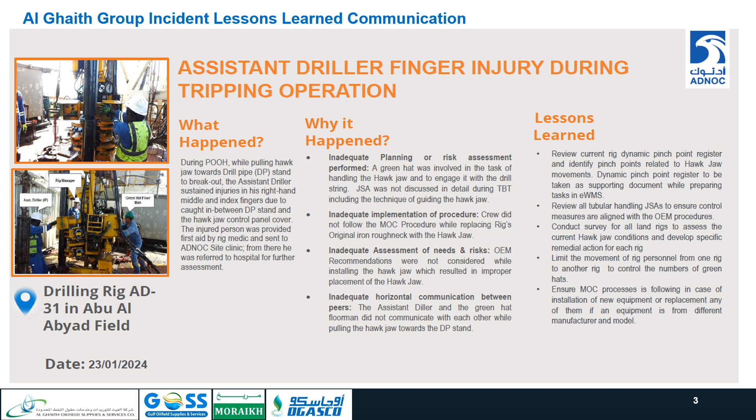Condensate pump fire at compressor station 1, CS1, at gas compression station 1 in BAB field. What happened? While conducting routine morning surveillance in the vicinity of condensate pump at CS1, the operations technician observed smoke from the drive end of the condensate pump, 11-31 P3701. The operator immediately shut down the pump after noticing some sparks and small flame. He immediately extinguished it using nearby fire extinguisher. No injuries were reported due to this incident and there was no impact to the facility or production.

Why it happened? Inadequate technical design. FCV was oversized, and the material was not appropriate, which resulted in poor control performance of spillback control valve. Inadequate assessment of needs risks. Continuous flow and discharge fluctuations were attributed to passing of FCV and improper configuration of controllers. Inadequate implementation of procedure, operating the pump beyond normal limits, runtime, resulted in excessive wear and tear.

Inadequate oversight. Main pump, P3702, was under repair for extended period, greater than or equal to 1 year. Standby pump was not available. Learnings not embedded. No timely actions on recommendations from 2022 RCA on the similar issues.

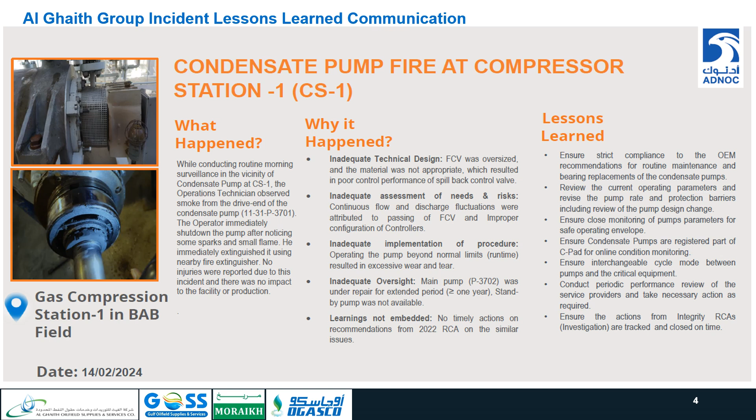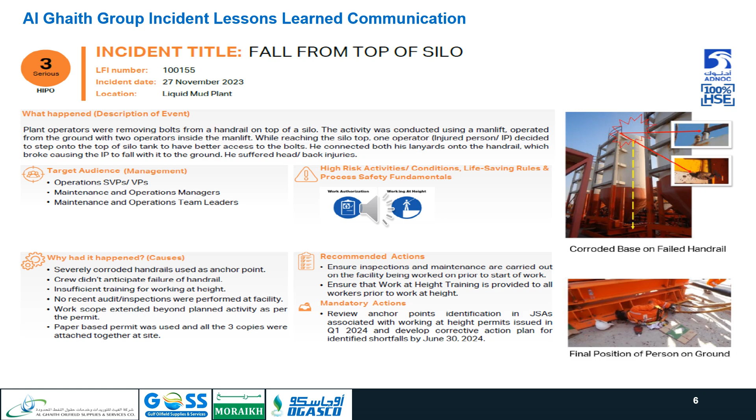Drill pipe joint dropped from rig floor to ground level at drilling rig AD 135, SB 634, in Asab field. Incident description: during run in hole with third-party 2 7/8 drill pipe, with a fishbone bottom hole assembly, while handling joint number 6 on the rig floor. The drift rabbit was lodged inside the drill pipe and crew were attempting to dislodge it by hammering. However, the drift rabbit remained stuck. Subsequently, decision was made to lay down the joint by the hydraulic catwalk.

As soon as the driller attempted to lift the joint, it suddenly slipped from the elevator to the rig floor, approximately 1 foot, and finally dropped to the ground level, 30 feet, near the V-door area. No injury to personnel and no equipment damage reported due to this incident.

Initial findings: improper use of equipment, using elevator directly with 2 7/8 drill pipe instead of using lifting sub due to insufficient elevator shoulder on drill pipe. Inadequate equipment, outer diameter of the drill pipe box and the inner diameter of the elevator were almost the same size, measuring 3 1/16 inches. Routine activity without thought. The rig crew did not measure and record ID, OD, and fish neck of tubulars in tally book.

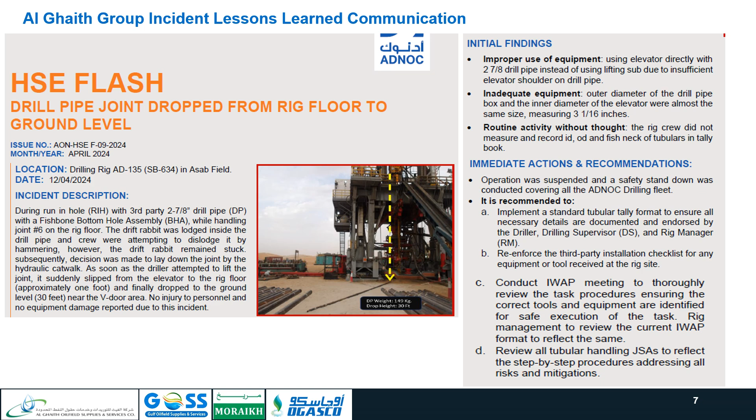Roustabout left leg caught between drilling pipe bundles at rig deck. What happened? Description of event: deck crew and crane operator were working on cantilever deck for laying down the drill pipes and arranging into bundle.

While the crane operator lifted the bundle 1 foot height to install a clamp and tag line, the bundle swung towards the IP, injured person. The IP moved away and tripped over by another bundle of drill pipes placed on the catwalk. The leg of the IP was caught between the drill pipes on the catwalk and suffered leg injury.

Why had it happened? Causes: expired/incorrect PTW lift plan in use. Crane operator is not competent to perform the task effectively. Not fully certified with limited English proficiency. 2 bundles were racked on the catwalk, creating an unstable bundle/trip hazard. Crane operator picked up the drill pipes bundle without signal from the banksman. Crane boom was not centered above the center of gravity.

Recommended actions: plan a stand down to refresh teams of the following: lifting plan endorsement/approval, permit validity, job roles, stop work authority, life-saving rules, drive the process of having and using only specific JSAs, non-generic, and approved lifting plans are in use.

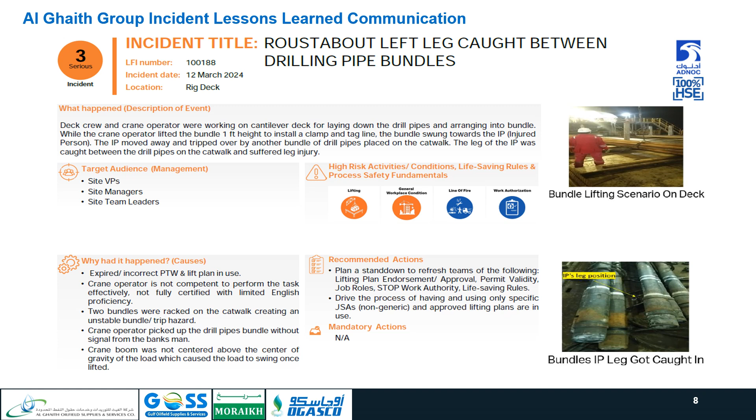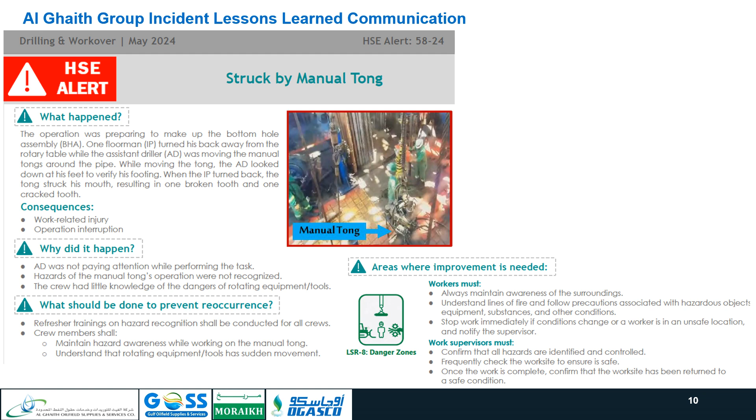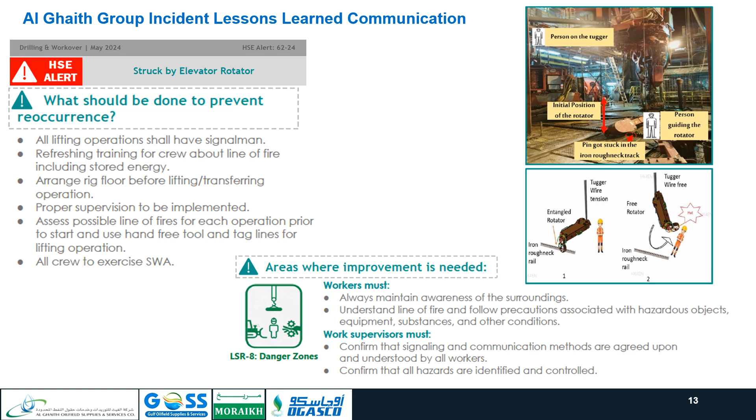Areas where improvement is needed: workers must always maintain awareness of the surroundings, understand line of fire and follow precautions associated with hazardous objects, equipment, substances, and other conditions. Work supervisors must confirm that signaling and communication methods are agreed upon and understood by all workers. Confirm that all hazards are identified and controlled.

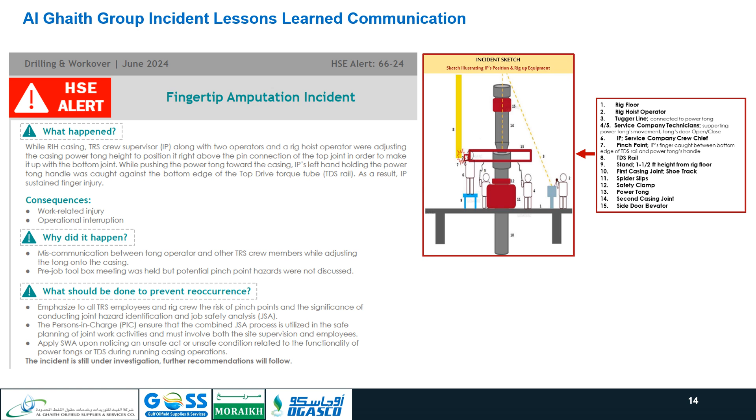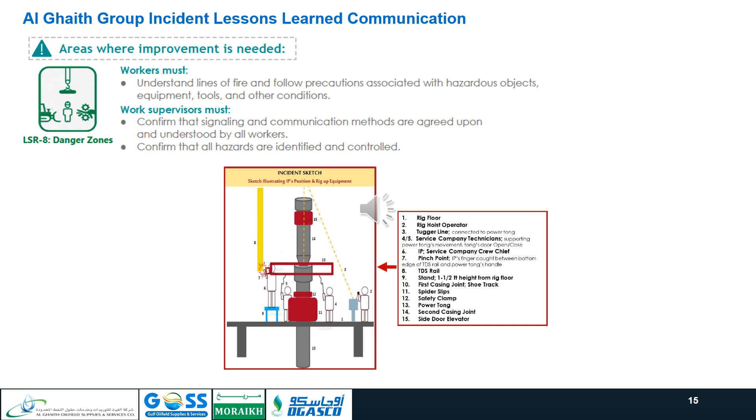Struck by manual tong. What happened? The operation was preparing to make up the bottom hole assembly. One floorman, injured person, turned his back away from the rotary table while the assistant driller was moving the manual tongs around the pipe. While moving the tong, the AD looked down at his feet to verify his footing. When the IP turned back, the tong struck his mouth, resulting in one broken tooth and one cracked tooth. Consequences: work-related injury, operation interruption.

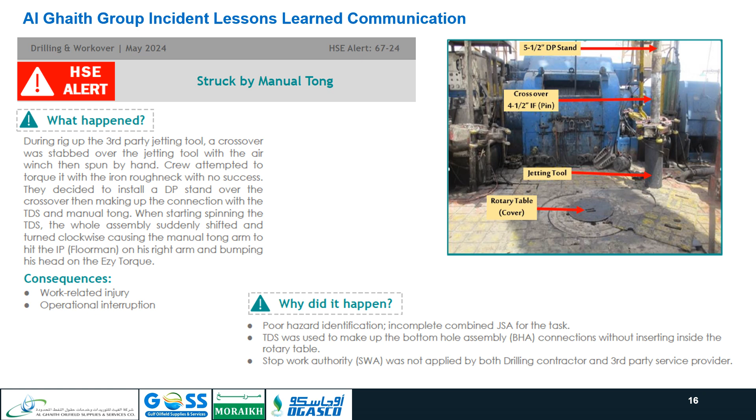Why did it happen? AD was not paying attention while performing the task. Hazards of the manual tongs operation were not recognized. The crew had little knowledge of the dangers of rotating equipment/tools. What should be done to prevent reoccurrence? Refresher trainings on hazard recognition shall be conducted for all crews. Crew members shall maintain hazard awareness while working on the manual tong. Understand that rotating equipment/tools have sudden movement.

Areas where improvement is needed: workers must always maintain awareness of the surroundings. Understand lines of fire and follow precautions associated with hazardous objects, equipment, substances, and other conditions. Stop work immediately if conditions change or a worker is in an unsafe location, and notify the supervisor. Work supervisors must confirm that all hazards are identified and controlled. Frequently check the worksite to ensure it is safe. Once the work is complete, confirm that the worksite has been returned to a safe condition.